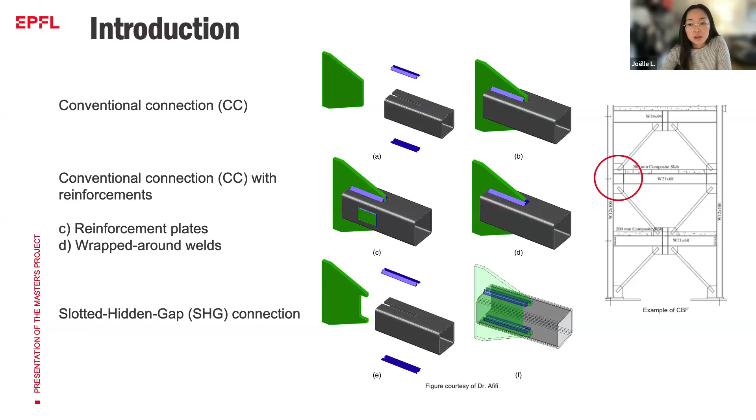However, those solutions require additional design and material, so time and cost, and return welds have been proven to be unsuitable for seismic applications. So the slotted hidden gap connection, which is shown here, was developed in the 80s, which consists of notching the gusset plate, so the welds can start in the gross section of the tube. And past research pointed out that it helps to push the stress concentration away from the connection, avoiding failure at that critical location.

So here's an overview of the existing research on that topic. It started first with Mitsui, and then Martinez-Saucedo and Packer, who studied the slotted hidden gap connection comprising round tubes. And then later, Moreau and Afifi investigated numerical models and lab testing of the slotted hidden gap connection, but this time including square HSS. HSS stands for hollow structural section, with an emphasis on tensile loading. As a result, Afifi and co-authors developed a design methodology to construct the slotted hidden gap connection.

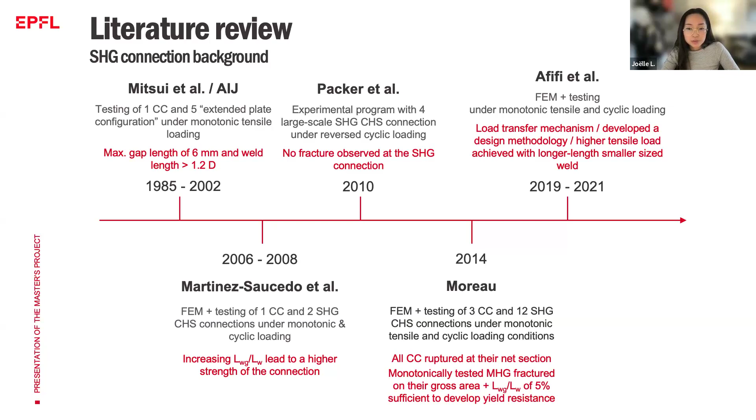However, for seismic applications, it is also important to investigate the connection under compressive loading, as typical compressive response such as buckling is not captured under tension. So the goals of this project are to assess the slotted hidden gap connection under cyclic loading conditions, with an emphasis this time on the compressive behavior of the connection. So to meet these objectives, a numerical parametric study is performed.

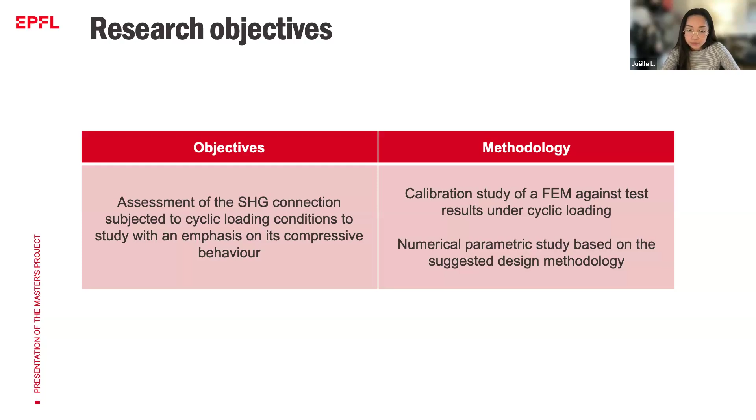So in order to create a realistic numerical model, we did first a calibration between our finite element model against some test results from a full brace tested in the lab by Moreau. So this is a picture of the tested full brace in the lab by Moreau, and this is a little bit less than 5 meters long.

So the square HSS, which is here in yellow, has a width of 203 millimeters and a wall thickness of 13 millimeters. And it is made from a CSA G40.21 Class C, and the gusset plate here in green is made from the American specification ASTM A572. So it is loaded here at the top, at the upper grip, according to this tensile dominated loading protocol.

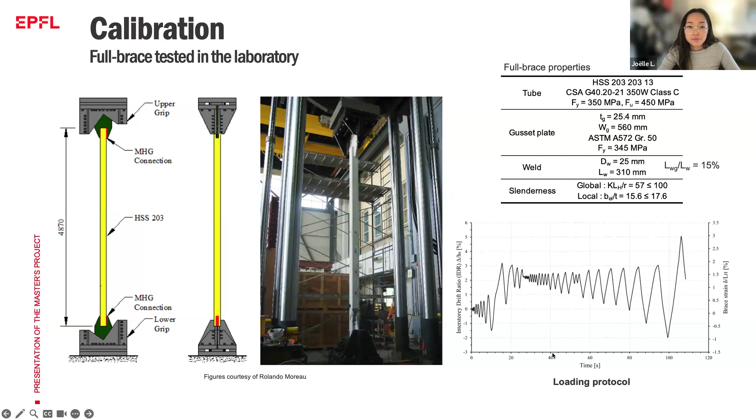So now I will describe the assumptions made for the numerical model developed in the software Abaqus. So this is a visual representation of the finite element model. So of course, we tried to replicate as closely as possible the geometry of the tested brace using the same dimensions and arrangement. So I'm not going into too much detail regarding the material, but we used a refined version of the Voce-Chaboche model to convert the tensile data obtained from the laboratory tests into more suitable data for cyclic applications.

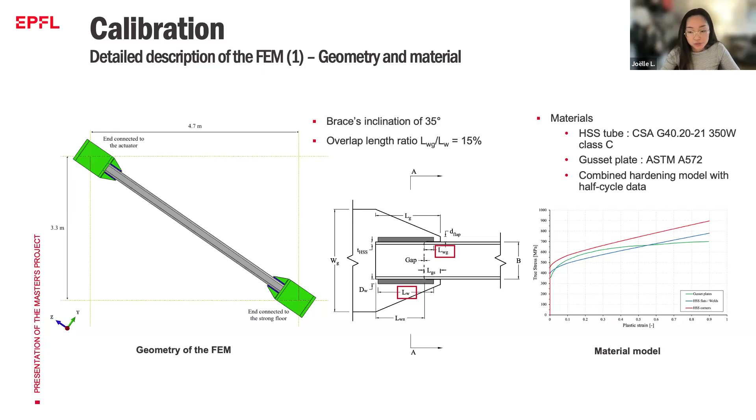So the compressive behavior of the brace is influenced by residual stresses and the initial geometric imperfection. So we included a longitudinal and transversal residual stress pattern to model the change in temperature during the manufacturing process of the tube. And then the initial geometric imperfection is modeled using a buckling analysis, including the first eigenmode where the node coordinates were scaled at L brace over 1000, as suggested in the Canadian standard.

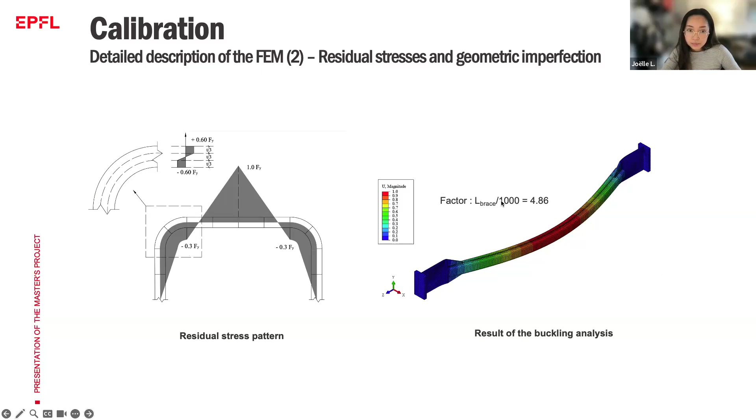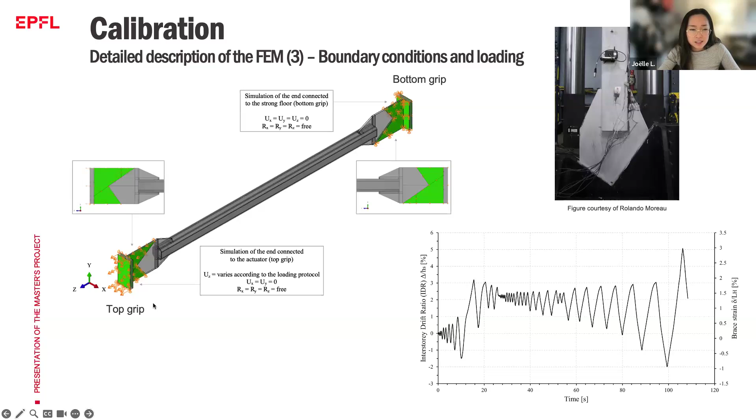Also, the model replicates the boundary conditions of the grip used to secure the gusset plate. So here's a picture of the real tested full brace. And we also use the same displacement-based loading that is applied in the longitudinal axis. For the mesh, a solid 20-node brick quadratic mesh element is used thanks to a larger deformation capacity and higher order shape functions compared to linear elements, for example. We also applied a finer mesh at the connection to achieve greater accuracy at this critical location.

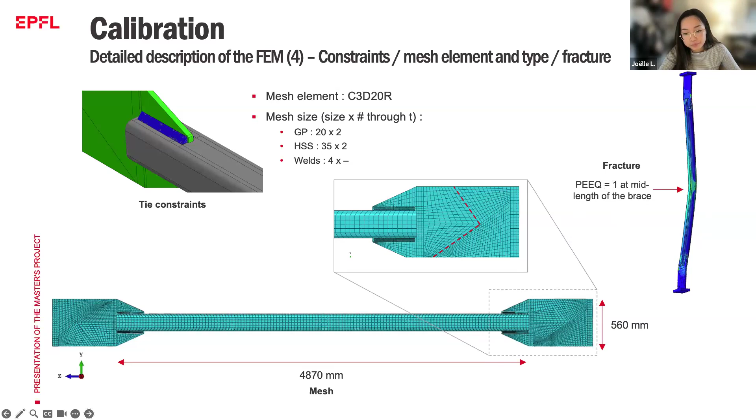Finally, to conclude the assumptions for our numerical model, we define the fracture initiation of the brace when the equivalent plastic strain, which is called PEEQ, reaches unity at mid-length of the brace. This criterion is based on previous research on bracing members. So here's the result of the comparison of our numerical model and the tested brace in the lab. So here on the left, we have specimen 12, which is the name of the full brace in the testing program, when it fractured. And here's a visual representation of the numerical model at the same stage.

So the criterion chosen to compare the finite element model to the test results is the force displacement relationship as presented in this graph, the red dashed line being the response of the numerical model. So one can see that the finite element model can capture fairly accurately the inelastic response of the full brace tested in the lab. We can make some comments on this graph. The first observation is that the experimental test here in black exhibits a slightly stiffer behavior, which can be attributed to a different residual stress pattern compared to the numerical tests.

We also have high buckling loads here that are observed, and that can be due to a different geometric imperfection that is implemented in Abaqus. And lastly, although it is a good approximation, greater accuracy can be achieved if a better-suited material model with cyclic data is used. So now that we validated our model, we can move on to the second chapter of the thesis.

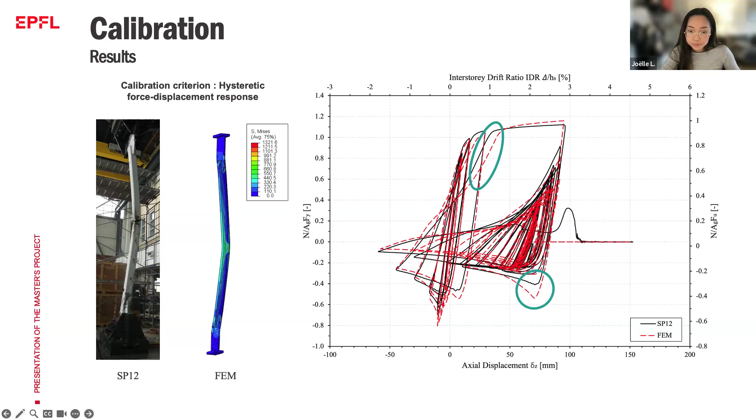So this section aims to assess the behavior of the gusset plate under cyclic loading and its impact on the performance of the connection based on several parameters. So for that, we created 21 different models while varying 4 parameters. So the first one being the HSS size. So we have 3 sizes here, the smallest one and the largest one.

We also changed the length of the brace because it will also influence the global slenderness. So we have the shorter length and a larger length. We also have 2 different weld configurations. The first one is A for the shortest one and B is for the longest one.

And lastly, because we are interested in the hinge zone in the gusset plate during compressive cycles, we included an additional parameter that defines the shape of the clearance. So either linear here, elliptical here, or none at all, which is constrained here. So for the ID notation, E stands for elliptical and C is for constrained.

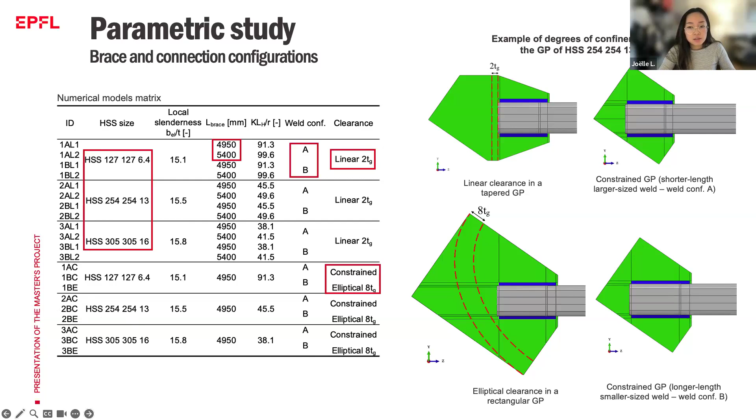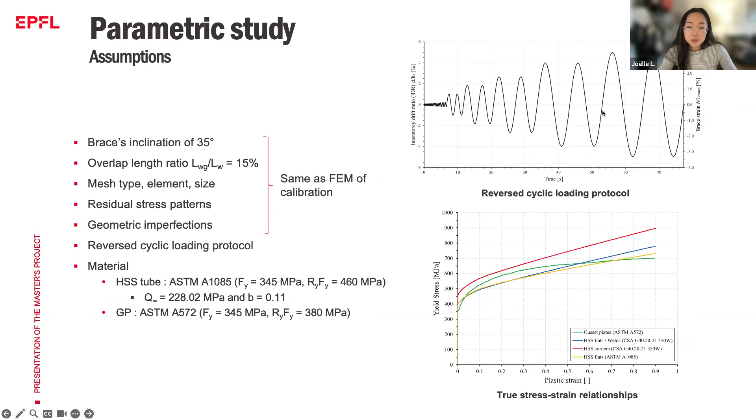So all models were designed using the suggested methodology by Afifi that I mentioned in the literature review. So for all 21 models, the mesh type, element size, residual stresses pattern, and geometric imperfections are the same as the finite element model developed for the calibration. Except for the loading protocol, we've decided to choose a symmetrical protocol this time.

So now we can move on to the results. So we have 4 types of results. The first one being the hysteretic force displacement response. So this graph shows the hysteretic response for the smallest HSS, but including all degrees of confinement. So the overall response is similar for all models except for the 1AC, which is the black line here. So 1AC is for a constrained hinge zone with a shorter weld. And we can see that it has a higher buckling load compared to the other ones.

So to understand where this difference can come from, I plotted the lateral displacement at their respective buckling load for the 1AC, 1BC, and 1AL1, which has a linear clearance. So we can conclude that a larger lateral displacement here at mid-length of the brace also means a larger rotation at the end of the HSS, thus reducing the actual force required to achieve that rotation. That's why here, because rotation is not permitted, we have a higher buckling load.

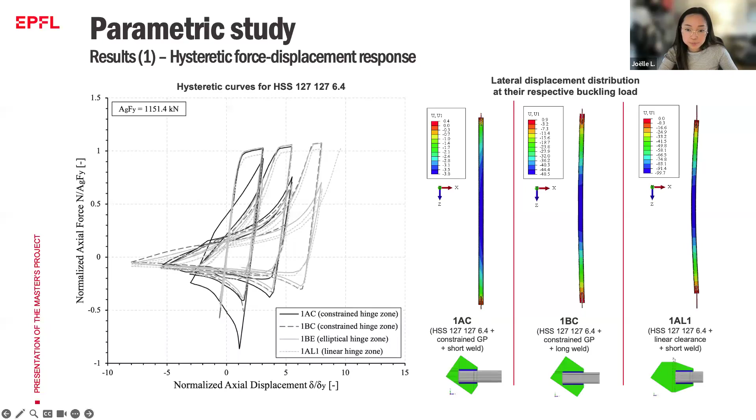Another interesting relationship to study is the moment versus rotation. So the moment is measured at the end of the connection here. So we have 2 graphs that show all levels of confinement configuration, one for the smallest HSS and one for the largest one. So again, the most critical model is the 1AC, which has the largest moment. So the one in blue. In the graph, the moment is normalized and all responses never exceed unity, which is comforting.

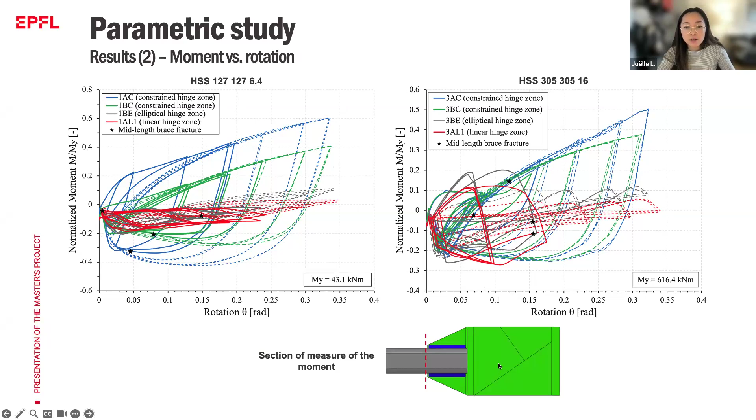And also a permitted hinge zone, so either linear or elliptical, so red and gray, exhibit the smallest moment in both cases, with a different shape for the largest one here. This suggests that a plastic hinge is forming in the gusset plate, enabling the moment to be transmitted beyond the brace.

So to illustrate what we've discussed, here are two videos of a constrained configuration here on the left and a configuration with a linear clearance on the right. So it goes a little bit fast. Because there is no dedicated zone in the gusset plate for a hinge to develop, the rotation is forced to occur at the end of the connection in the HSS. We can see that clearly here.

And for the right one, we have a linear hinge zone here. So we can clearly see that the hinge zone develops in the dedicated 2tg clearance here, which does not force the HSS to bend, but rather the gusset plate.

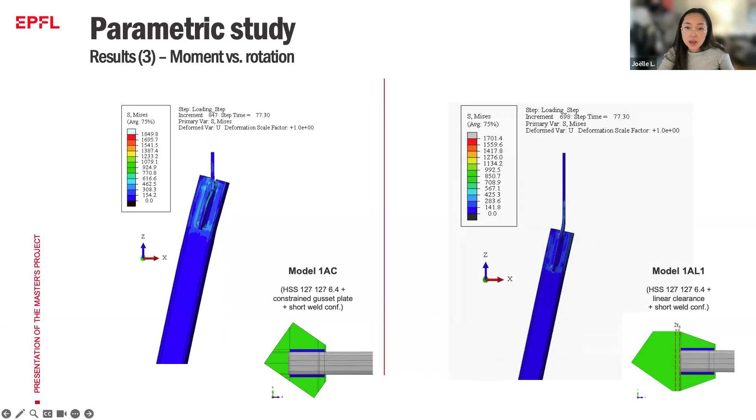The third type of results is the PEEQ versus drift. So the PEEQ is the accumulated plastic deformation. So I decided to capture the PEEQ distribution at two critical loads, being the buckling load and the ultimate load, for the most critical models, being the 1AC, 2AC, and 3AC. So they show two critical points, one here at the end of the tube slot and one here at the extreme fiber of the HSS.

So the PEEQ-drift relationship is studied for both locations. So the left one shows all degrees of confinement for the smallest HSS. And as expected, the highest PEEQ is achieved with the 1AC, which is constrained with a shorter weld. So the lines here show the PEEQ measured at the end of the slot, but the star here shows fracture at mid-length of the brace. So what we can see is that the fracture at mid-length of the brace occurs before the PEEQ at the connection reaches 1, which makes it capacity design protected.

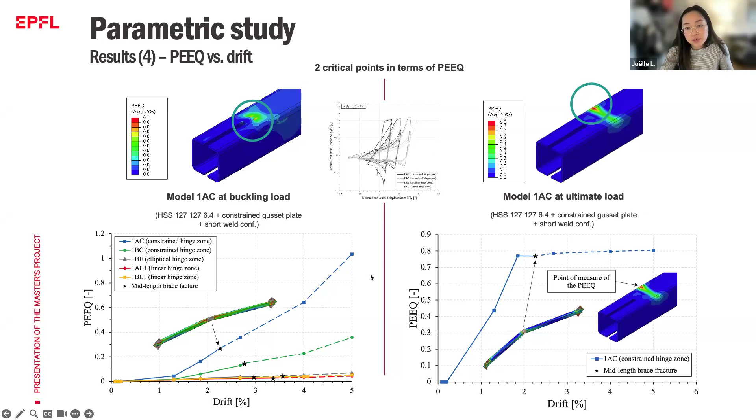The right one, the PEEQ values are much higher because the maximum stress is, of course, located at the extreme fiber at the corner. So at this stage, the approach used to define fracture initiation for this location might not be sufficiently accurate. So it leads to the conclusion that a permitted hinge zone, so either linear or elliptical clearance, is recommended in practice.

So we can move on to the last type of results. So it's the von Mises stress distribution. So I chose to compare the 3AC and 3BE, sorry, because we can see that the difference is meaningful.

So on the left, we have the stress distribution for a constrained configuration, where at multiple locations, the Fy is reached. We have, especially around the connection, some disparity in the distribution. And on the contrary, with an elliptical configuration, rotation occurs here in the gusset plate, so higher stresses are apparent in the hinge zone. But along the brace, we have much lower stresses compared to this one.

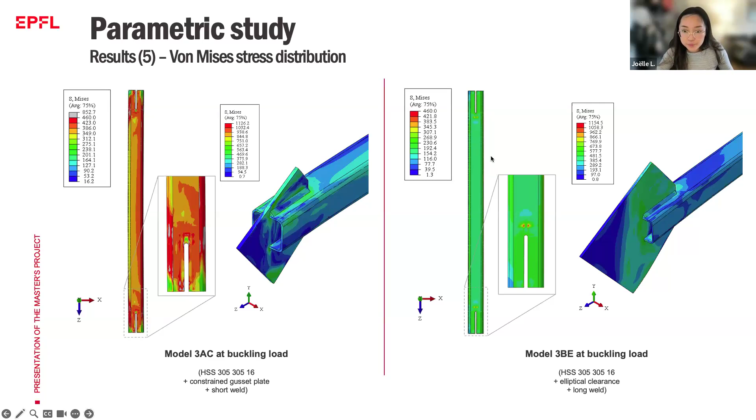So these graphs conclude the results chapter, and now we can go through a brief summary as a conclusion. So the first thing is that the force displacement showed that the 1AC, 2AC, and 3AC, so again, the constrained configuration with a shorter weld, experienced the highest buckling load, and a free hinge zone will exhibit a lower axial load. Also, these models reach the highest moment compared to the other configuration.

The equivalent plastic strain revealed two critical locations, and their response showed that the connection is capacity design protected. A permitted hinge zone allowed to reduce the plastic strain. And

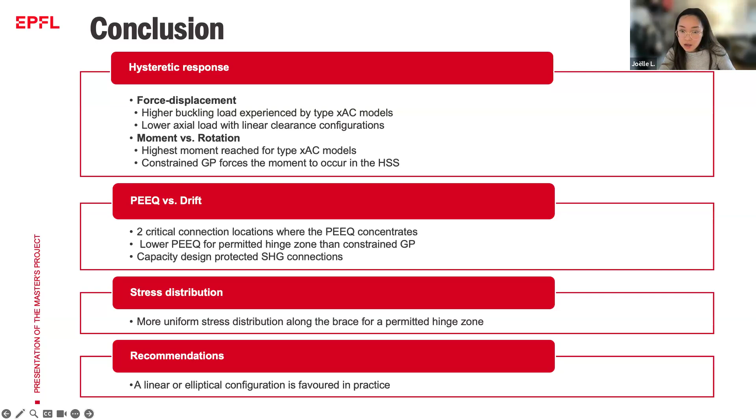finally, as a recommendation, based on what we found, I would encourage to design either with a linear or elliptical configuration, although a constrained gusset plate is also possible. But as we said, it will lead to higher plastic strain, moment in the HSS, and also buckling load. So we also have a larger weld that will allow to have a better stress distribution. So with that, I can conclude.

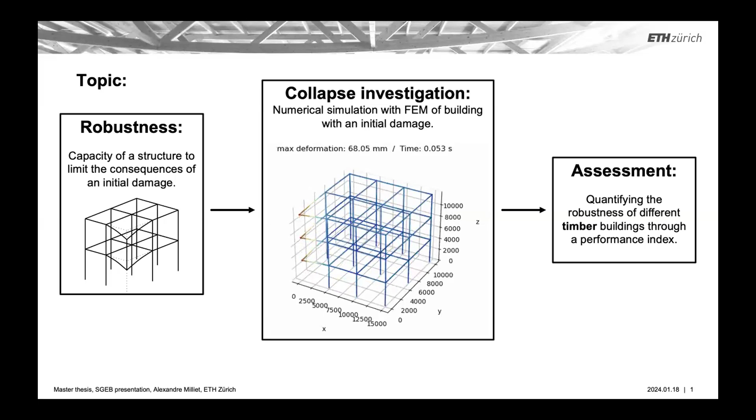And you might ask, why are we doing this in timber, especially? Timber is getting kind of a renaissance. We have higher and bigger structures that have been planned and built in recent years. So as the buildings get higher and bigger, if something fails and collapses, then the consequences are also getting higher.

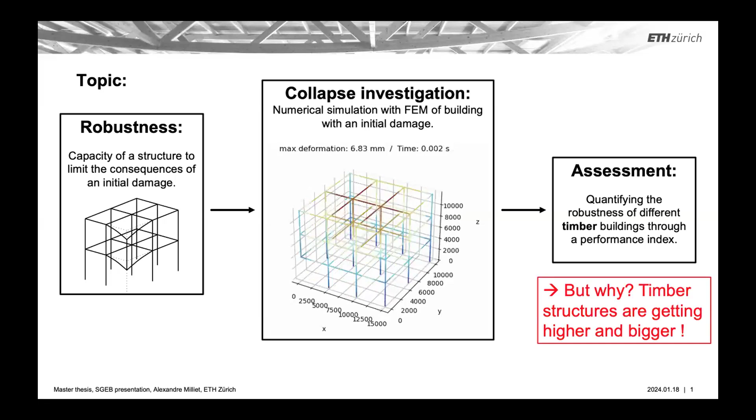And it takes into account the geometrical and material non-linearities, and we can calculate everything dynamically. So in this framework we used and developed, we implemented a lot of specific features that we need for the purpose we're aiming at, so modeling collapses.

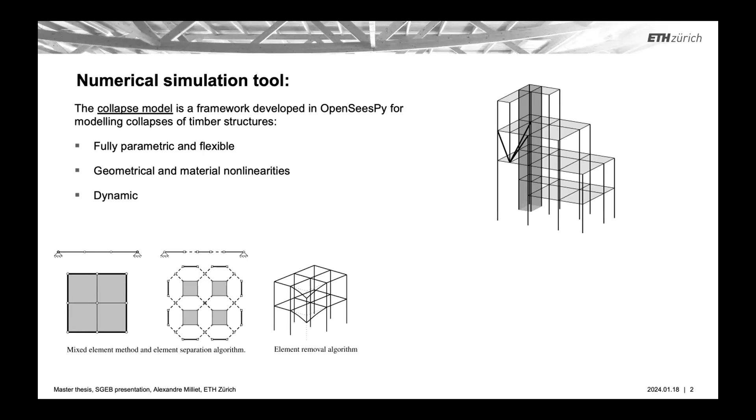So we're using something we call the mixed element method, and it's a derivation of the finite element method. With this, we can try to separate elements through an algorithm if something fails. And we also have an element removal algorithm to introduce all the damages that we want to model. That's the key point, the start point of the collapse, when something is broken or something disappears from the structure.

And we also have a lot of features based really on the failure. So when something fails, we track it and see how it falls down, and probably at some point it will impact an element below, and then this element might break due to the energy of the falling element. So those are things that have been implemented; they are working, or we have to expand them as the software gets bigger or for specific purposes.

And what is important to say, we can model any type of structure based on an orthogonal grid. So we have this grid where we can choose the span of each beam in both directions. We can also introduce trusses to stabilize the structure. We are working on shells and walls to implement them as well, but as I finished my master thesis, this was not going perfectly. So I just left them aside and worked only on the trusses and the connections and so on.

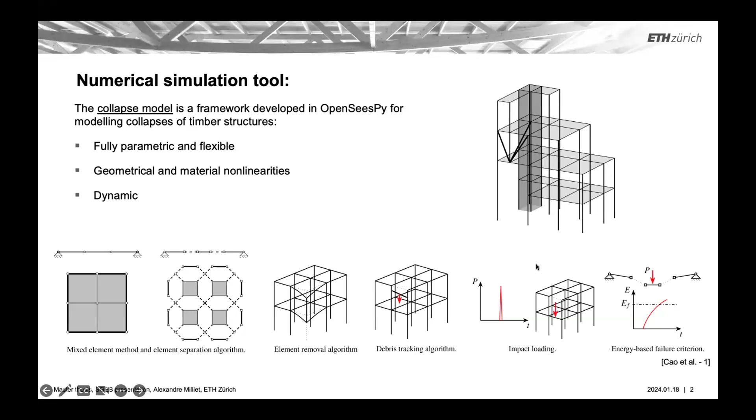And you see here, this is an example of something we can program and try in the software. So now, to explain how the mixed element method works, the principle is really simple. We have our finite elements, and between those we always have rigid links. These rigid links are there to get deleted if the resistance at this part of the structure is exceeded, I mean, if the internal forces are higher than the resistance. At this point, we can delete those links and the structure will behave further.

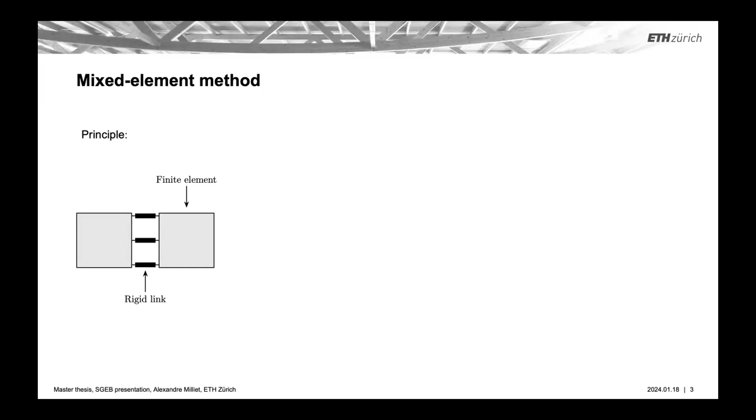And the good thing about this is that we don't have a stability problem, because the number of nodes in the structure remains the same. So the matrix size for all the calculations stays the same; just the values differ at this stage. So in the example of a simply supported beam, as we have plenty in the structures, the circles are not hinges, just nodes. We see that we have each beam element, and between those we have these rigid links.

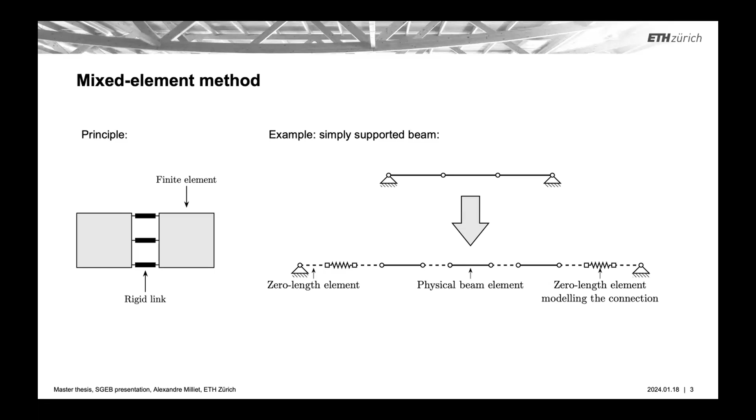And what is also important is that timber is not really massive or clamped with the other parts of the structure. We always have a connection, and these connections are modeled also through a link between the support or any other element like a column. And these connections are really key to how the structure will behave. So we have to model this, and this is something that we implemented in the software.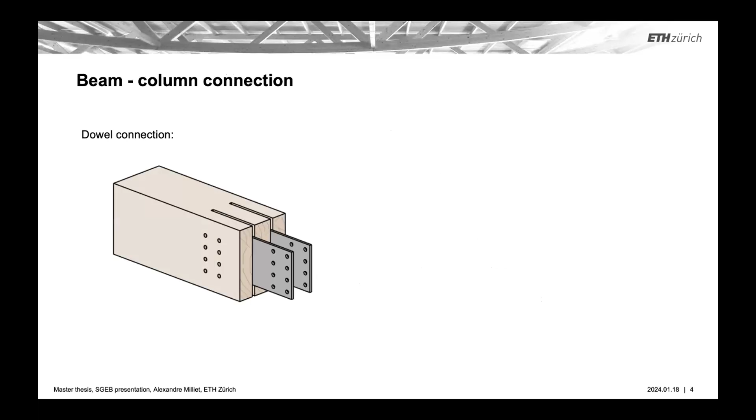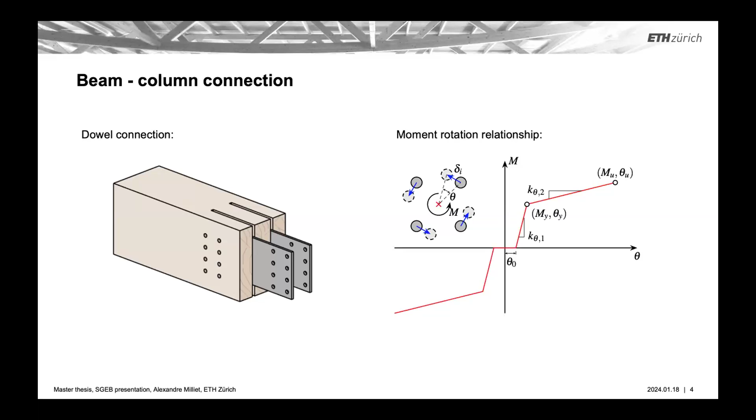So all the beam-to-column connections are modeled as a dowel connection, where we have steel plates going from the column to the beam, slotted into the beams, and then we have dowels inside the steel, making the shear transfer of the connection. And this dowel connection, depending on how it is constructed, might reach a moment-rotation relationship. So we can have a moment resistance. It won't be clamped, it's not rigid, but it has a semi-rigidity. And this is something we modeled through a hysteresis in the model.

So after all the development had been done, we tried a simple model to see what results we can get. The model we used was a two-story frame building, double symmetric to make it easier, with a story height of 3.5 meters and a span of 4 meters. We always use glued laminated timber GL24h for those. It should be representative of higher structures, but due to computation time constraints, we reduced the size of the problem.

What is important to mention is that in timber high-rises, we mostly have columns that are continuous over many stories. This is done because timber has better properties in the longitudinal direction for the vertical load.

And we connect all the beams through a connection to the columns. So we mostly have a simply supported beam that is not clamped, but not simply supported either; with this connection, we can have a half rigidity.

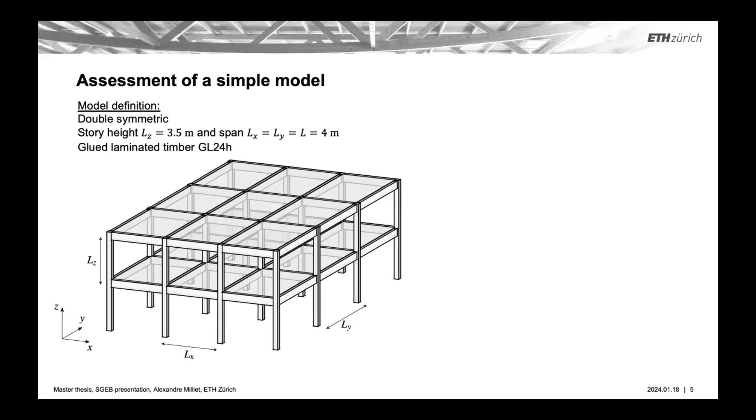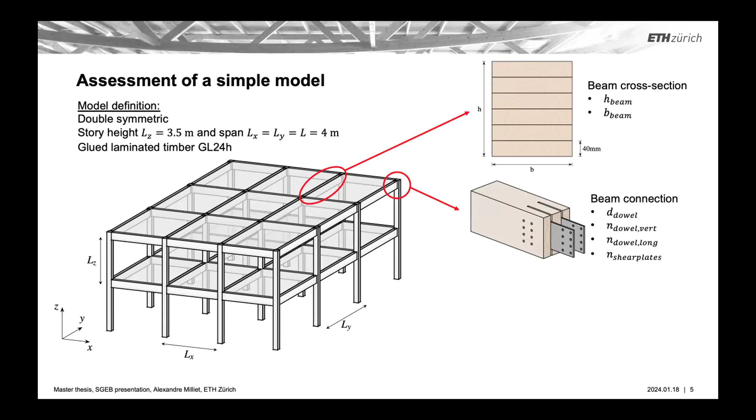In this model, we would like to try many variations of it and see what are the main properties that are important. So we can still define the beam cross-section with the height and width. The width can be freely chosen. The connection can also be chosen freely with the number of dowels, their diameters, the number of shear plates, and so on. And the column cross-section, which is square, just to respect the double symmetry.

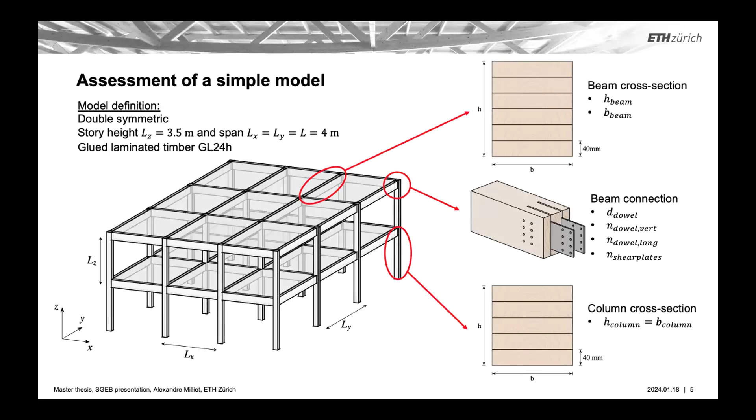And so we created with this model and these parameters a pool of structures that we then run through the simulation and see how they behave. First we set all the parameter ranges for all those beam and connection parameters. And the thing is we would like to have only realistic buildings, because if the structure cannot be built, it doesn't matter whether it is robust. So we loop through all the combinations of the parameters we have and sorted out only the realistic combinations to assess them.

So we make a design with the ultimate limit state and serviceability limit state with a normal load case, with a self-weight, a dead load, and a live load. And we don't only want to match the minimum requirement, but we don't want to have an over-designed structure either. So we just keep a range of things that are possible. If the beam is really enormous, then it won't be built because it's not economical. So we use only the 50 models that we consider realistic.

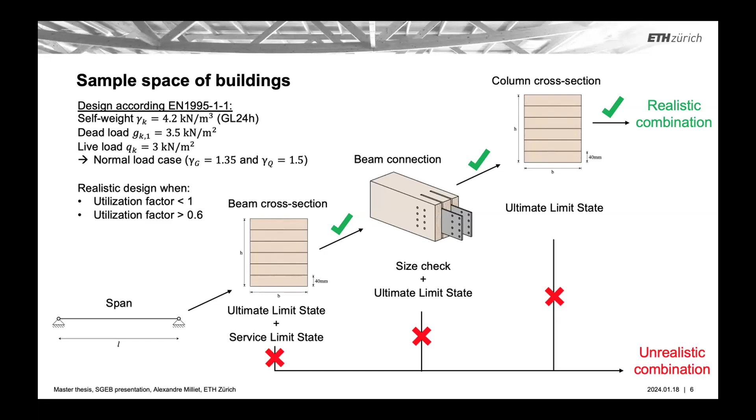And then with these 50 models, we run them with an initial damage, which was set as a column removal, where there are 3 cases: we remove the corner column, the edge column, and the inner column. And at this point, when we have damage, we are in an exceptional load case. So we use other factors for the load in the software.

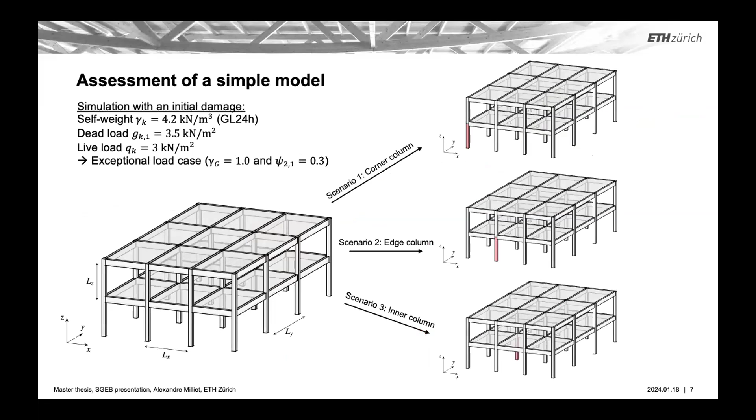Just to explain how the simulation works: first, when we start the simulation, we calculate the internal forces and the displacement of the structure in a static way, just to see if it can still bear all the loads we have. And then at time 0, we remove a column and start the dynamic analysis. At this point, we do 2000 time steps of 0.5 milliseconds to capture the response in the most realistic way, with really tiny time steps.

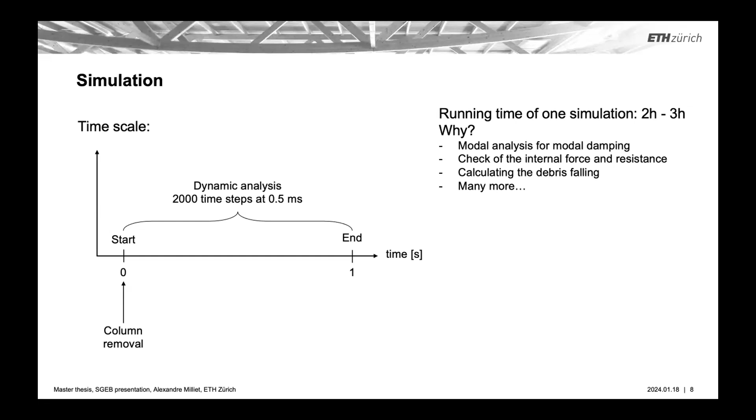One simulation on a good computer for the simple model took 2 to 3 hours. So when we run the 50 models with the 3 scenarios, it takes a lot of time. And it takes so much time because we are checking the internal forces at every time step. If the resistance isn't sufficient, then we do the separation of the elements and check if something is falling. And we also do a new modal analysis at each time step to implement new modal damping for the structure. So we update the modal damping at each time step if the structure gets separated or evolves.

And then when we had all our simulations with all the data they provide, we tried to assess all the results. The performance index is not so easy to explain, so I'll just explain the principle. We express everything in cost, where we first consider the cost of constructing the structure, and then sum the event cost of each scenario, where the event costs are the cost to replace the structure, or the parts that have fallen, but also societal costs, because if the structure falls and people are inside, there will be injuries and deaths, and those are costs to society. So we also consider them to make things a bit more realistic.

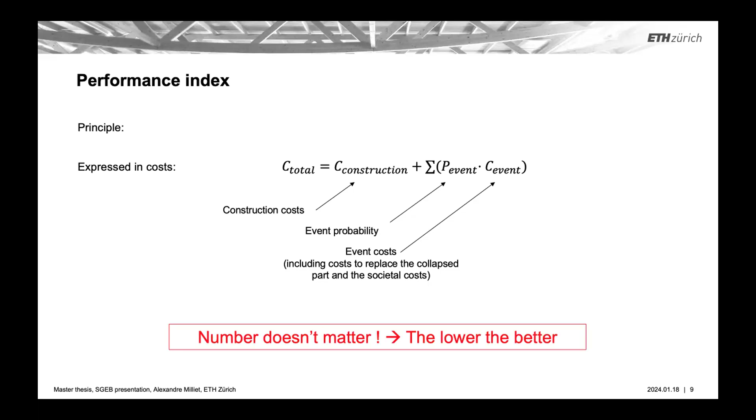This can be criticized, and it was criticized also from my side, but never mind, the numbers don't matter in these terms, because the results are kind of clear. So just remember that for the performance index, the results are better if the number is lower. So now I present to you the results.

So we ranked all our models on a scale based on the performance index, and we really see clear trends, where we have a couple of models behaving really in the same way. And it's more a question of whether the structure fails or not. There are no real differences in structure if some parts fail a bit, but not the whole structure and so on.

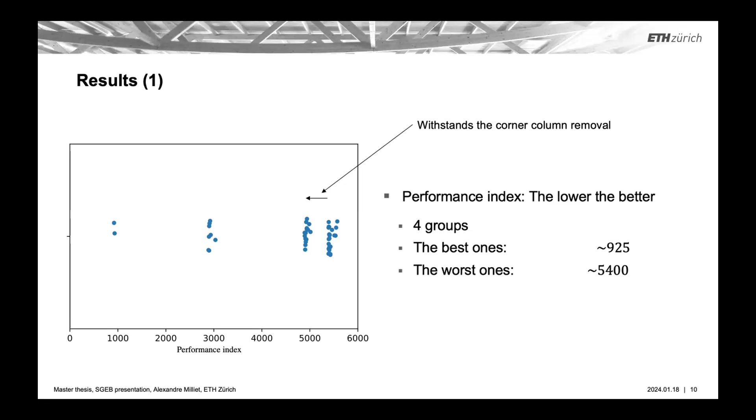And we really see that the group on the right fails in every scenario. Then one group a bit to the left can withstand the corner column removal. Moving further to the left, they can withstand the two scenarios with the edge column and the corner column removal. And then the two models on the left withstand all three scenarios. So this is basically the result.

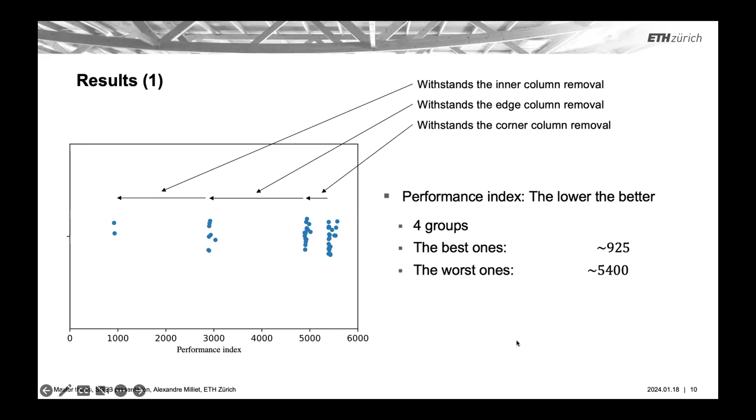And the important thing about this is we have to know why some structures fail and some don't, to improve the structure and find rules to design structures in a more robust way. For example, model 9, which fails in every scenario, always has a partial collapse. So why this model? Compared to model 22, which just displaces a bit and survives in all three scenarios. This is something we took a look at.

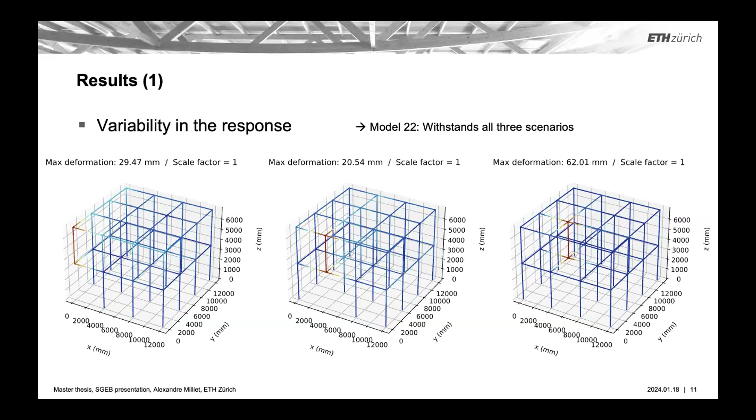This is probably the most complicated slide, but just know that we have a lot of data, so we looked inside, and this is both model 9 and 22 for an inner column removal, where we looked at maximal normal shear stress utilization in all elements. So we calculate the most loaded element in the structure at each time step, and look if something will fail. And we see that, for example, in model 9, the highest point is 0.5. So the structure doesn't fail because the elements are not big enough, and neither does model 22.

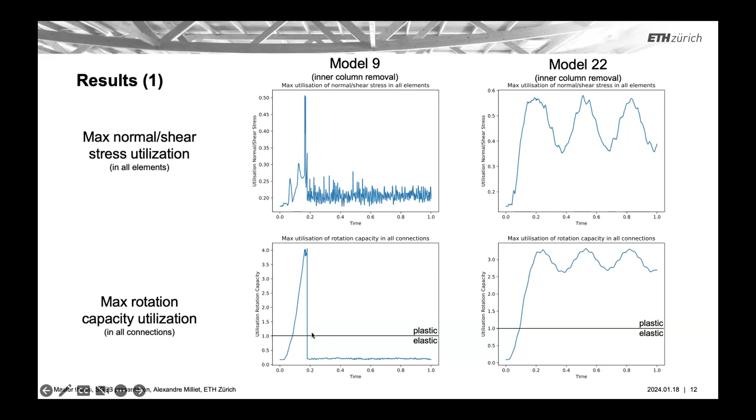But if we look at the connections, we also have all the data about rotation capacity utilization in all the connections. And we see that it increases quite sharply after the removal, and reaches the plastic zone fast enough. And at the point where we reach 4 times the elastic rotation capacity, we said this was big enough and then it breaks. So the difference between the model that survives and the model that doesn't is that the connection is not stiff enough and rotates too much until it breaks.

So then we went through all the results compared with the stiffness of the connection, and we really see the clear trend that if the structure has a stiffer connection, it has higher chances to withstand all the removals. And this is normal because there is a link between the stiffness of the connection and the moment resistance of the connection. So as the stiffness gets higher, we can withstand higher moments, so we can redistribute the forces in a better way.

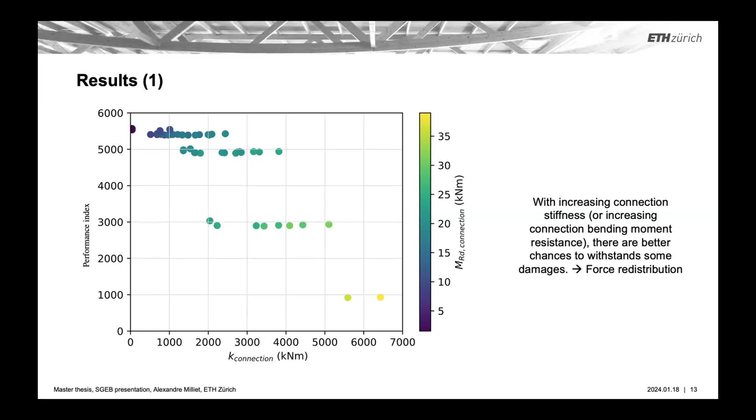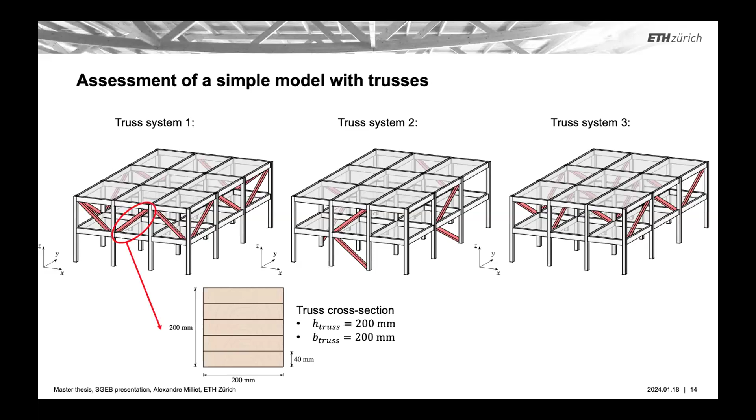And after this, we started to look at whether simple trusses in the structure can also help to redistribute the forces, because at the previous stage, the structure was not stabilized. It was only a frame. Now we looked at a 3-truss system and made a new simulation, with trusses of 200 millimeters in size. We performed the three simulations, and we have seen that the trusses can really help redistribute the forces and help withstand some scenarios independently of all the other parameters we used for the beam cross-section, connection, and so on.

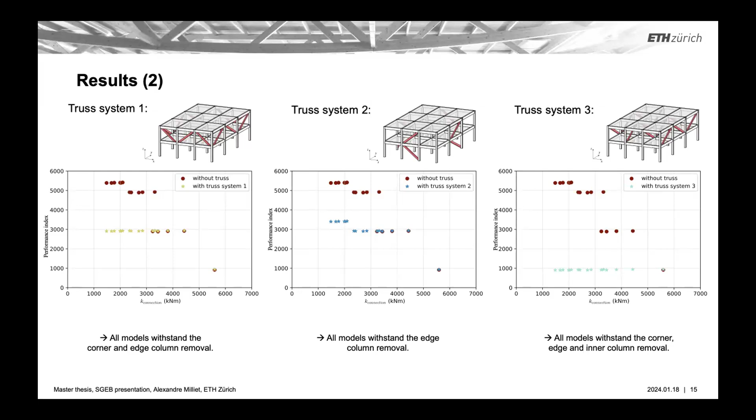And this is really the key, because in timber high-rise structures, we will have trusses to stabilize horizontally, or maybe even an outrigger made of trusses to stabilize all the forces, and this can really help the structure in those exceptional situations.

So as a conclusion, if we would like structures to be robust, we have to have redundancy. And in the examples we looked at with the software, either we can have a stiff beam connection that then has a moment resistance instead of a simply supported beam, or we can put in trusses. The results are kind of understandable and obvious, I would say, because we did realize at the beginning that if the connection is not stiff, almost a hinge, then as soon as we take out columns, it moves as a mechanism. So it is kind of obvious that we have to introduce a stiff beam connection or trusses to redistribute forces.

And what is also important to say is the software is in continuous development, and there is another student right now doing the same master thesis and developing it further. So they will have different and new features coming on and new investigations with it.